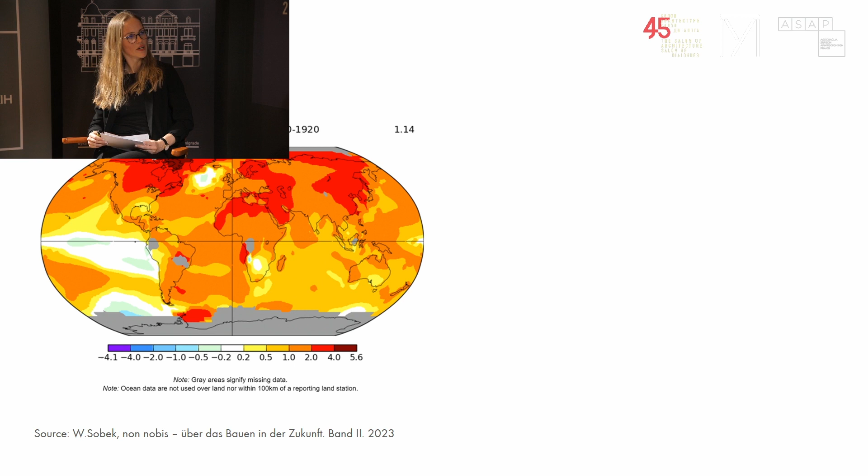Mostly because the construction industry is a big reason, or one of the reasons, why we're in this situation. Obviously not the only one, but it is a big one. Looking at these figures, the built environment and building activities stand for roughly—obviously very rough figures—35% of energy consumption, 50% of mass waste generation, and about 50% of material consumption. If we look just at mineral building materials like stone, cement, bricks, etc., it would actually be over 80%, so even a lot higher. And just looking at mineral building materials, about 50% of greenhouse gas emissions.

So that means there is a huge responsibility on us as engineers, as architects, but obviously also as investors and builders who demand new buildings and who want to build new buildings. At the same time, humanity is growing at an average rate of 2.6 people per second.

So this enormous consumption of materials, the waste generation, the energy consumption, and the emissions associated with the building sector are at the same time faced with growing humanity. So we have to build with less materials, but at the same time we have to build for more people. So this is probably one of the biggest challenges that we're faced with, that we have to build for more, but we have to build at the same time with less.

Use less new material. We need to build with something, so what should we build with? We need to use recycled materials, and then again, we need to build in a way that it is recyclable, the construction, that we can take the buildings apart and use the materials in new buildings. So all of those challenges that we see here, they're basically all aiming towards a zero emission construction of a building.

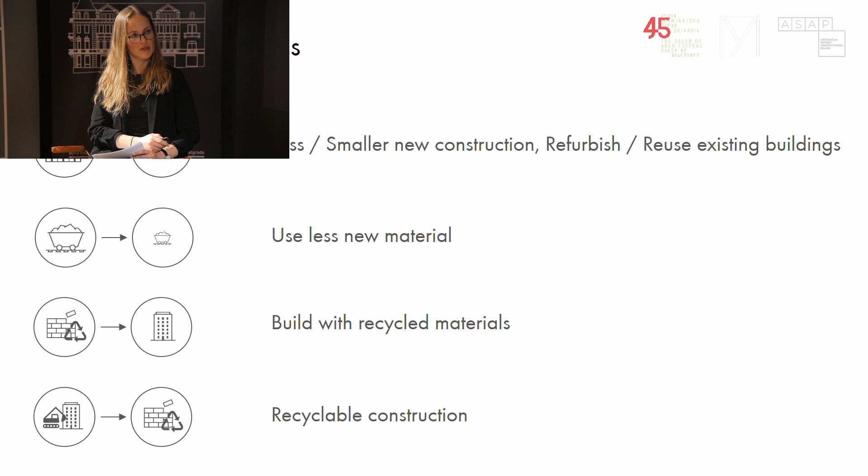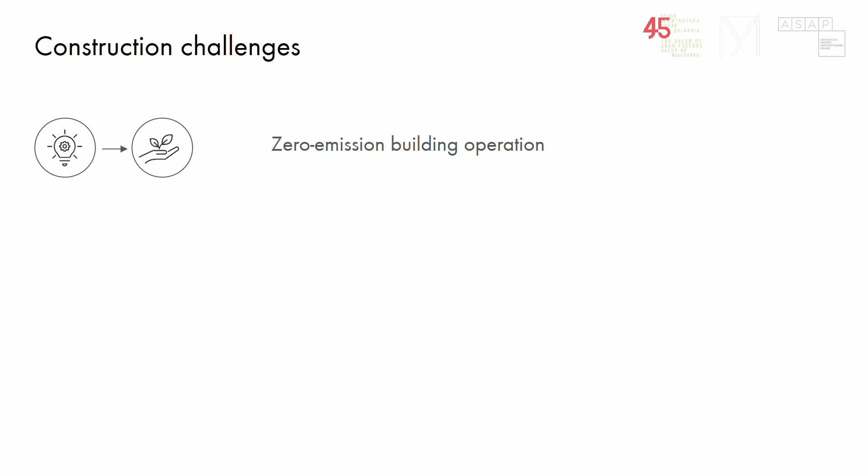We also have to design buildings so there are no emissions during building operation, and at the same time enhance biodiversity and take care of the microclimate.

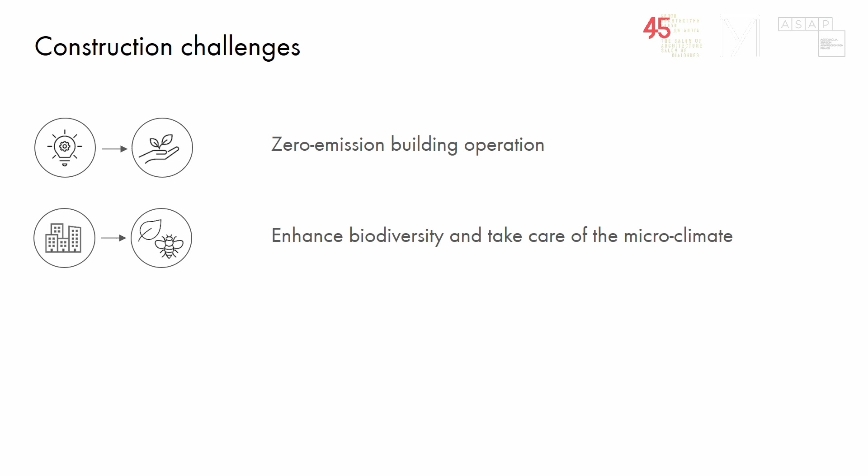So bearing those construction challenges in mind, I'd like to focus on a couple of key factors and show you a couple of project examples, which would be grey emissions, energy, circular economy, and microclimate. Starting with the grey emissions.

So here we see the emissions of, let's say, a conventional new building made out of concrete. If we look at this, like at the beginning, in the construction of the building, there's already a huge part of emissions occurring before the building is even put to use, the so-called grey emissions.

Then during operation, there's obviously emissions occurring over the time of the use of the building, which is highly dependent on the energy concept, on the energy efficiency of the building. And then usually after about 25 years, there would be some renovations taking place, some new materials, especially some components being renewed, like windows, etc. And then after another operation phase, the building is then demolished after 50 years, which would be a classic building these days.

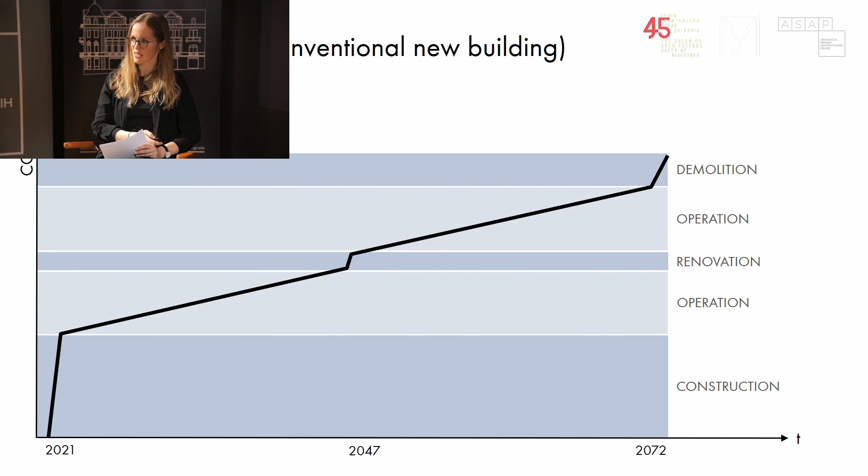Because some of the buildings that are built today are unfortunately not used for hundreds of years anymore, as they have been hundreds of years ago. Some of those buildings are still in use. So what we see, or what we've seen, is that there's a large part of the emissions that's already actually on the construction side of the building and not actually due to the operation.

That means that the energy consumption has gone down, with new energy regulations coming in place frequently. And therefore, the operational phase has decreased significantly if we look at the overall emissions over the life cycle. So what's happening still at the moment is that there is a transformation of the energy mix towards renewable, non-fossil generation. So what will happen is that the emissions will continue to decrease during the operational phase, meaning that the construction and the grey emissions will dominate even more and become even more relevant to be looked at.

So over the last couple of years, actually in Germany, there's been subsidies by the government for new buildings, which have mostly focused on energy efficiency, which we've basically seen here. So similar to the legislation, when a building has been specifically energy efficient, you would get subsidies from the government, which were actually quite attractive for investors.

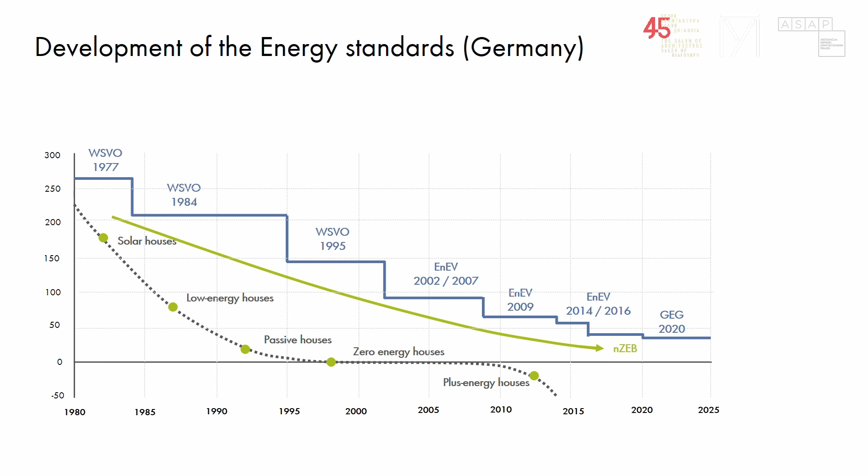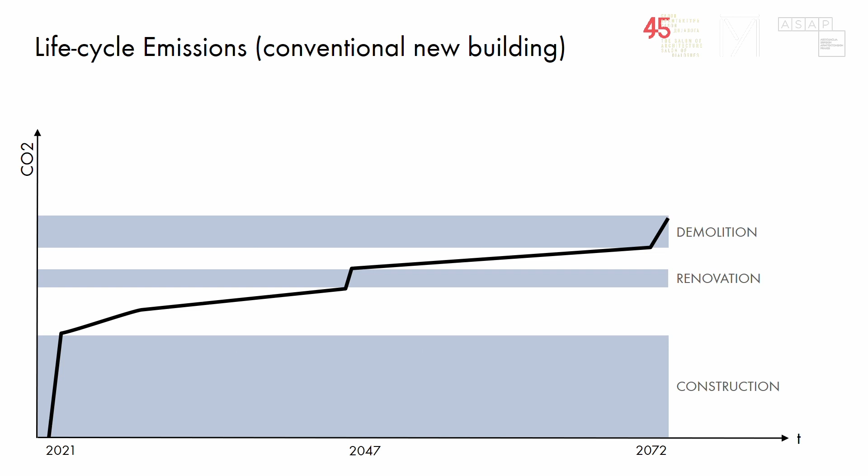And actually only just now, as of the 1st of April, they've started to not only give the subsidies to buildings that are energy efficient, but there is actually a second aspect that needs to be looked at, which is there's a certain energy efficiency class that needs to be achieved, but there's also a life cycle analysis that needs to be done with certain values to be achieved. So the grey emissions are now also being taken into account in order to get those subsidies from the government. The requirements at the moment are still relatively easy to achieve. So basically we're at the beginning, where we've started off with the energy efficiency classes a couple of years ago, but it is a start and it will continue to become more and more strict.

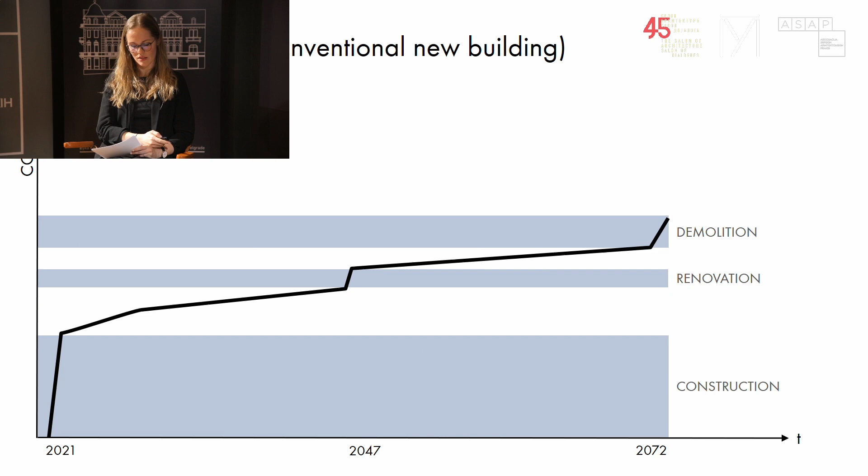So now I'll show you a couple of projects where we looked at the grey emissions in particular. The Quelle is a refurbishment project of ours in Nuremberg. We were responsible for the structural engineering and the facade engineering.

And there we did an emission study where we looked at two scenarios. The first scenario is revitalization with a partial demolition, so there were a few building parts being taken out, with still about 80,000 square meters - but it's a huge project, so there were still 170,000 square meters that were refurbished. The second scenario we looked at was entire demolition and then building a new building. To make it comparable, we looked at building exactly the same building, to exactly the same standard, with no differences to what's there.

Total demolition and new construction is still relatively widespread these days, because in most cases it's actually cheaper - less expensive to tear a building down and build a new one. Also, as we all know, with existing buildings you're usually faced with a lot of difficulties, like the height of the ceilings, which might result in daylight availability, or acoustic problems with the ceiling constructions in place. So it is tricky to use existing buildings, which is why sadly the second scenario is still chosen quite often.

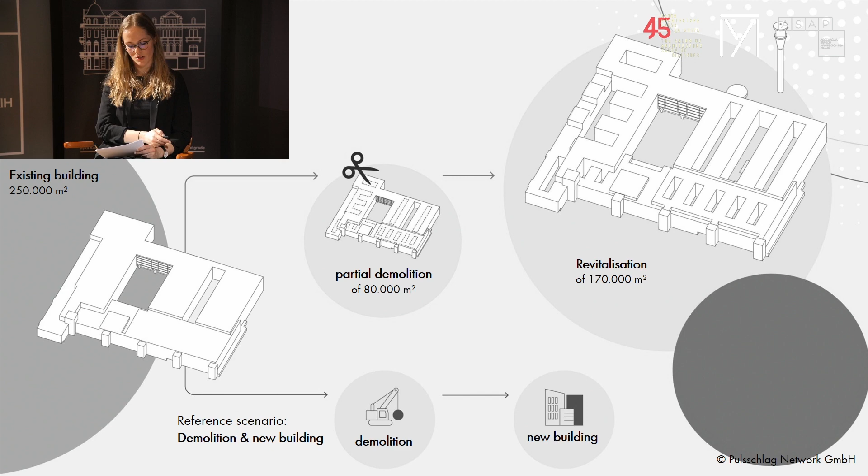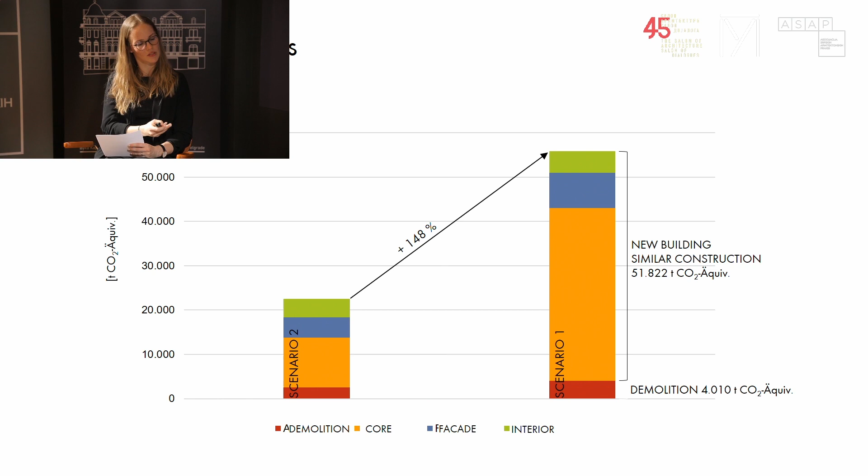So here you can see basically the same thing in a bar chart, which also shows you the proportions of demolition and rebuilding. Demolition, it must be said, is here without transport, so there would be transport emissions that would have to be added onto it. This isn't considered in this case, but it only makes up about 10% of the total emissions.

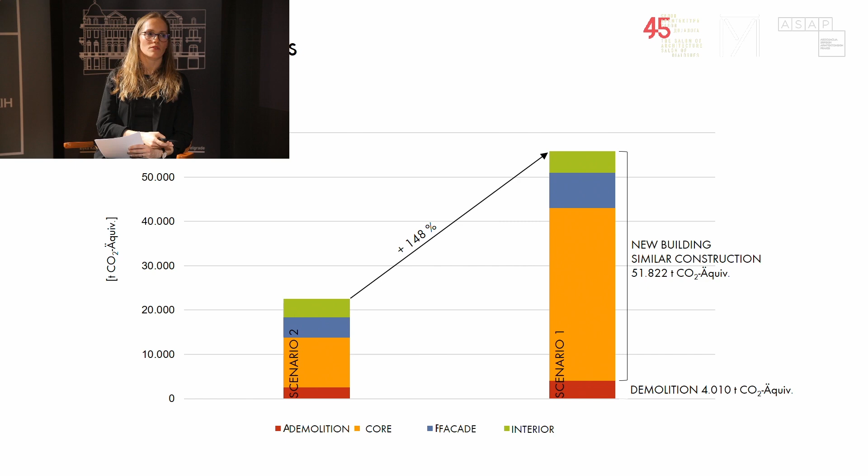Also, what needs to be said in that case - this is a study we did based on certain parameters that were set. As I've already said, we assumed the new building scenario would be exactly the same as the old one. There are obviously aspects like, for instance, materials from the old building that might have been able to be reused in the new one - something we didn't consider in this scenario.

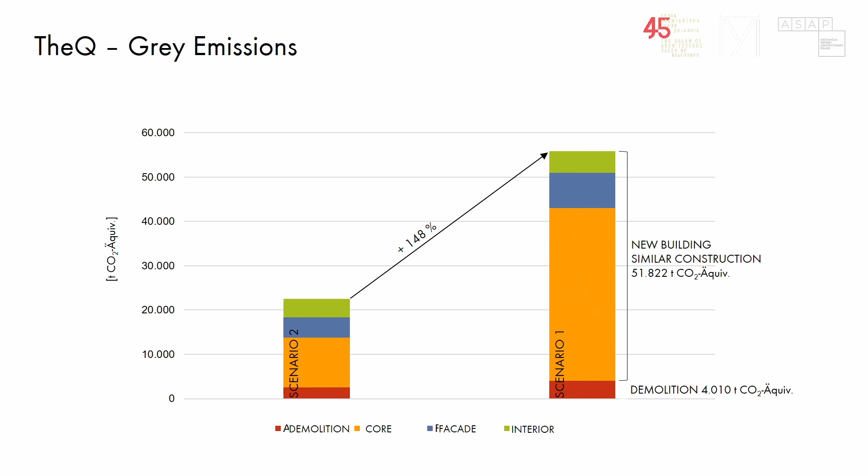At the same time, any structural engineer in this audience might know that with old buildings, with today's legislation it's sometimes quite hard to build in the same way, because legislation has become more strict and there are a lot more security factors in the calculations. So we might have had to build with thicker ceilings than they were able to build back then. There are a few factors that make this only a rough estimation, but under those parameters, this is the scenario that we calculated.

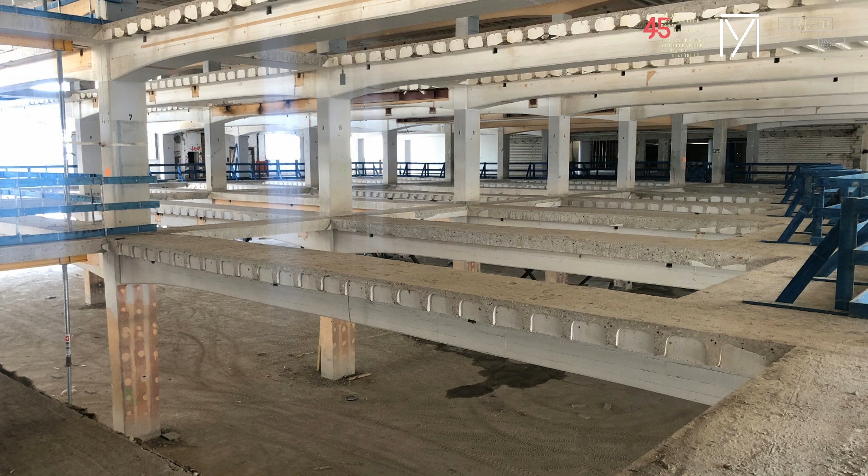This is an image of that partial demolition. There's an atrium space that was created where we took out a few ceiling bays in between the load-bearing structure.

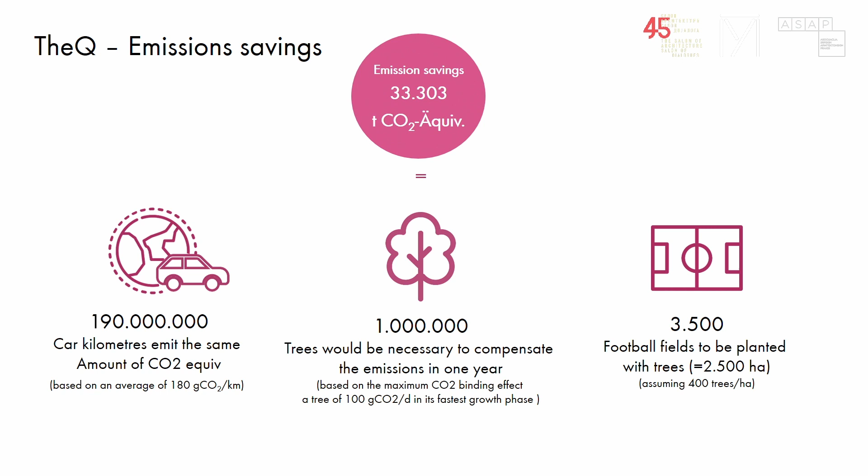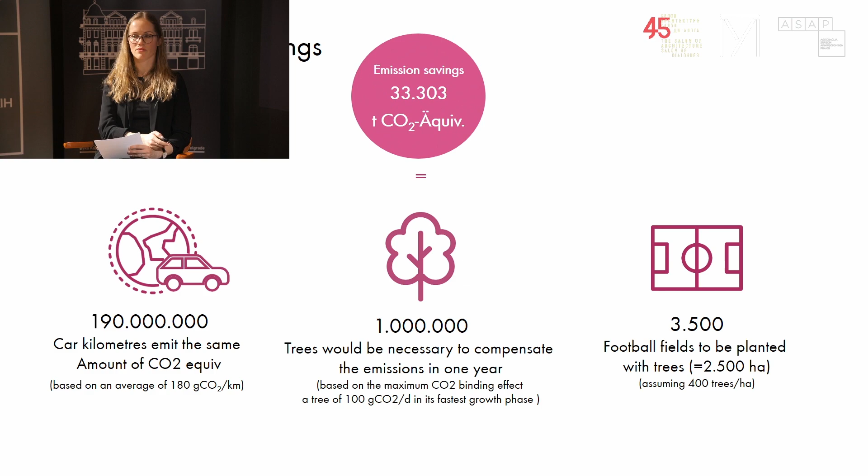The results of that study were that the savings amounted to about 33,000 tons of additional greenhouse gas emissions that were avoided - which would correspond to roughly 190 million car kilometers, or 1 million trees binding this carbon dioxide over a year, which would have to be planted on about 3,500 football fields. These are enormous figures that make quite clear that we need to look at the resources we've got and how we build, especially on these massive projects, when it comes to the basic decision of whether it's going to be a refurbishment project or a new building.

A second project where we did basically the same or a similar study is the Quartier in Austria.

So this is a couple of examples of how to approach grey emissions. Quite obviously, using existing structures is not always an option, because there might not be an existing building there, or in some cases the existing building might not actually be usable. So for new structures, it's important to look at the project-specific requirements and find the ideal structural system.

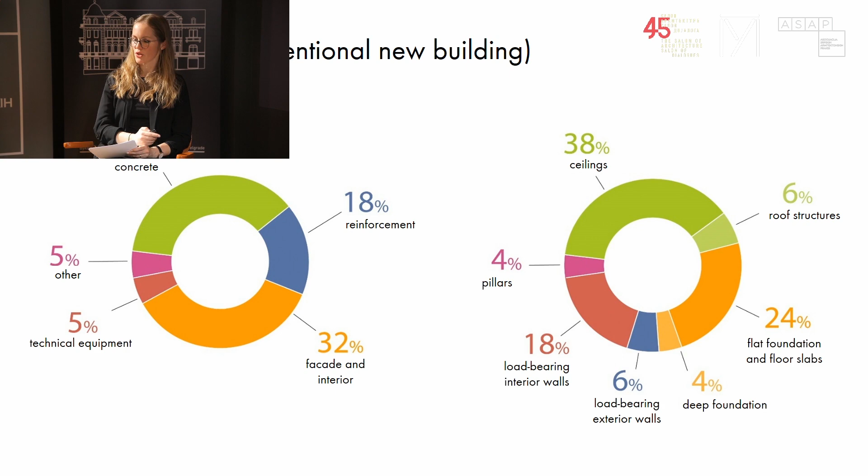So this is one of the main things we need to look at, and this is how we need to approach new buildings and new construction in the planning process: finding the ideal structural system for each project. This can be alternative construction methods, like wood construction, or a combination of wood and concrete construction. It can also be hollow body ceilings, which are very optimized in regards to the materials being used.

So looking at all of those different scenarios, always taking all of the aspects into account - one thing is obviously the structural engineering properties that need to be right, and the sustainability aspect, but then also aspects like acoustics need to be taken into account. Can we achieve the acoustic requirements depending on the building usage? So it's always relatively complex, trying to incorporate every single aspect into the decision.

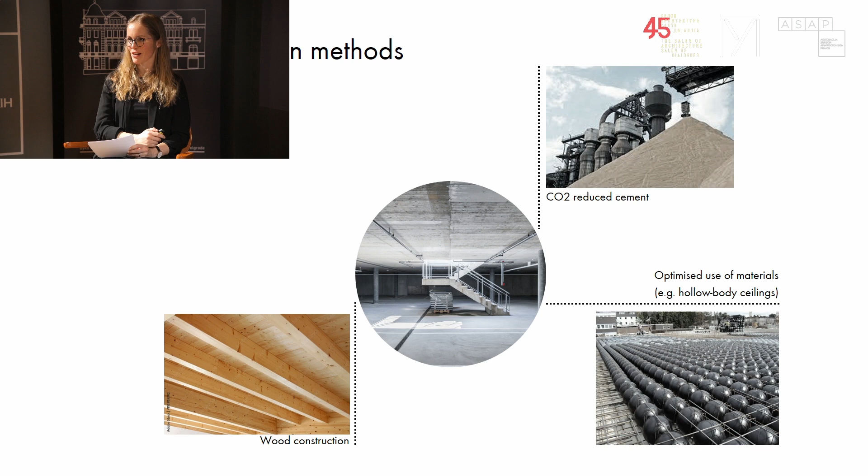Alternative construction methods is obviously one scenario, but even if none of these alternatives is suitable for the project, it's still about looking at the structures in particular and making sure there's no over-dimensioning in the calculations - rather than just defaulting to 25 centimeters of concrete because that's what we're always building, but actually looking at the building and doing the calculations properly to find the ideal scenario for each project.

The good thing about this latter approach is that while with wood construction you're very dependent on the client and the investor - are they up for it, is everyone on board, because wood construction usually has higher costs associated with it - with the latter option of just making sure there's no over-dimensioning, every structural engineer can influence this. So this is the baseline and the goal for all of our projects: material-reduced structural systems.

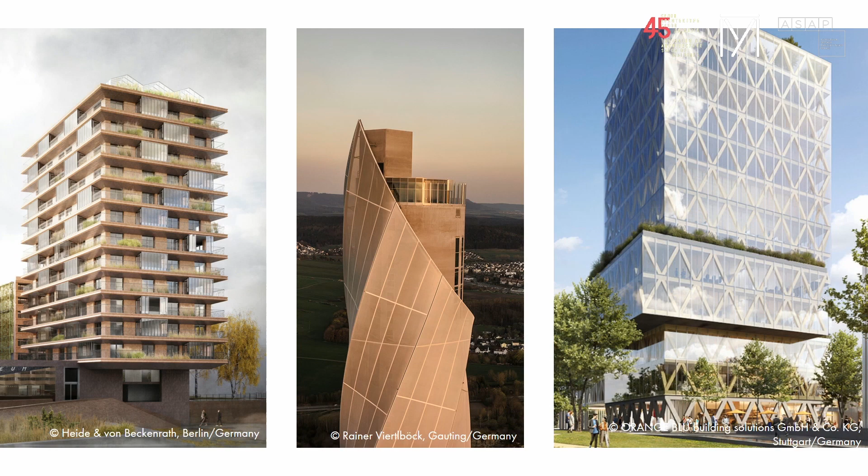So this is just a couple of, it's not just renovation projects that we do, this is a couple of new projects, but I'm not going to go into more detail about them. There's one on the right-hand side, for instance, with a wooden structure.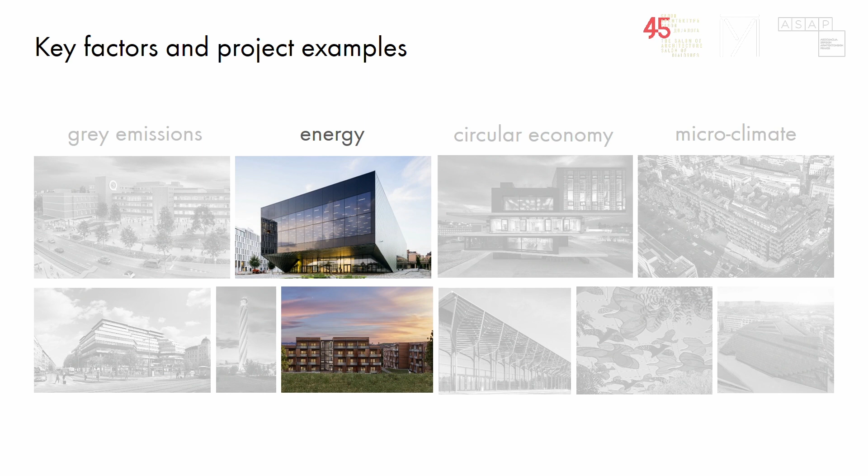So that was about the grey emissions. As we've seen when we looked at the life cycle of grey emissions of a building, the operational energy phase is becoming less and less dominant. Even so, while grey emissions might be dominant, we still need to look at the energy consumption and emissions during the use phase. Firstly, because there are still emissions associated with it - just because it's less doesn't mean we can neglect it. So there's still emissions associated with it, and the path toward non-fossil energy generation is still on its way; we'll still be on that path for a while.

Secondly, there's also the social aspect and associated costs, because there are always costs that come with running a building, which we need to take into account, and energy bills are a factor in that. So looking at the energy efficiency of buildings is probably the most well-known part of all the topics I'm going to talk about, but it's still an aspect we need to look at.

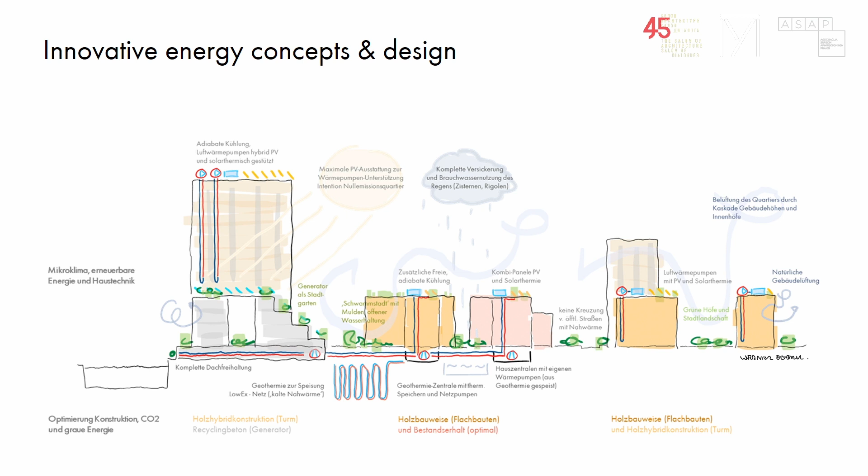So the approach to that is with intelligent energy concepts, and the most important part of the energy concepts is looking at both active strategies, but mostly also passive strategies. So looking at solar gains through windows: what are the passive strategies, without actually using any energy, that we can do to reduce the energy consumption of the buildings? For instance, as I've said, solar gains. In summer, we don't want them. In winter, we do want them. So looking at adaptable strategies to make use of those.

One important tool is always simulations, all sorts. In this case, a photovoltaic simulation. But this is always a tool that can be sometimes quite hard to sell to the client at the beginning of the project, because why do you need simulations? You can just calculate it, but it is the best way to efficiently find the right system for the project.

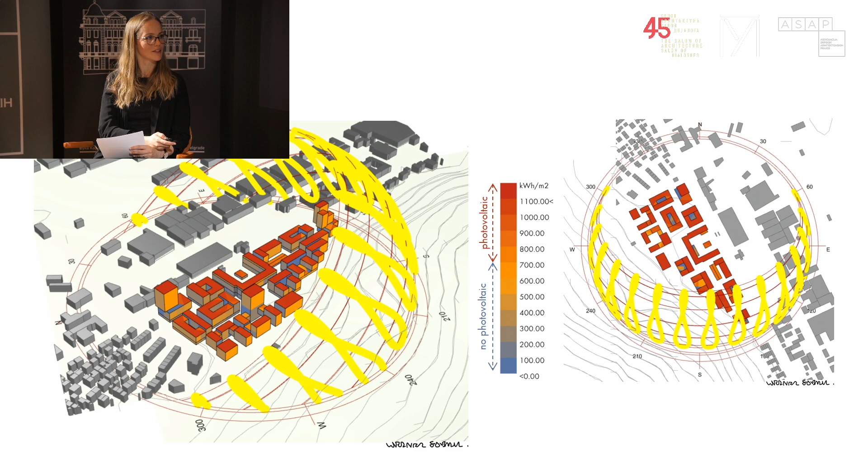So this is the Futurium, formerly called House of the Future, in Berlin. It's an exhibition and event building in Berlin, and we did the facade engineering, sustainability consultancy, building physics, and the sustainability certification, all sorts of things that come with it, like life cycle analysis. One focus of the consultancy was the close cooperation with the MEP planner in this case, to find a joint optimization of the energy concept. So the result here was an innovative energy concept with regard to active and passive measures.

And thanks to the comprehensive consideration of all sustainability issues, the building fulfills the BNB Gold standard. BNB is a German certification system similar to LEED or BREEAM, but it is the certification system that is used in Germany for public buildings. So actually it's compulsory for all public buildings to be certified according to this system. And the House of the Future, as it's called, I guess it was to be expected, fulfills the highest standard. That was the goal set from the beginning.

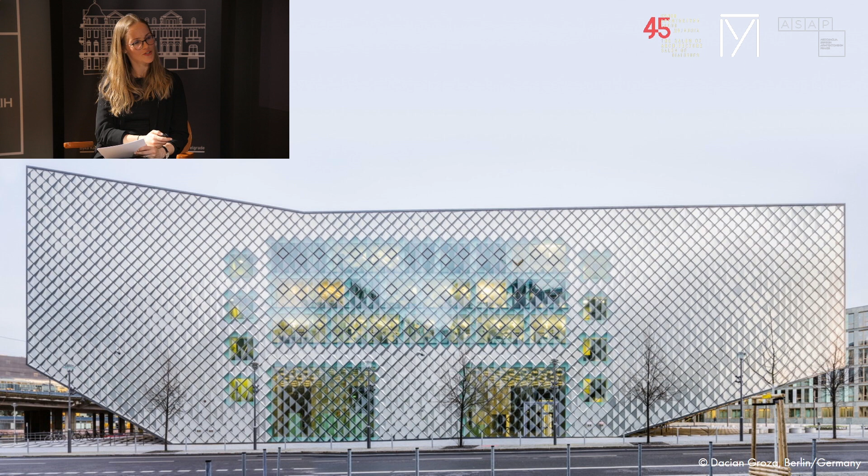Despite its sophisticated, very interesting architecture, it is a primary energy plus building, which was made possible because it's a very compact design. There are a lot of passive measures used, especially in regards to the building envelope, and there's strictly demand-oriented air and energy supply, and very highly efficient building systems, using a lot of solar thermal energy and photovoltaics, and electricity storage systems. So with those storage systems, the demand and the generation peaks can be balanced out. And in the annual balance, the building provides a primary energy surplus of 8 kilowatt hours per square meter, or 99,000 kilowatt hours per year.

Those figures are in relation to the German Energy Efficiency Act. So according to the German Energy Efficiency Act, what is taken into account in these calculations is things like lighting, all of the building technology. What is not taken into account is things like laptops, the user equipment that's brought in. So that energy consumption is then obviously added on, but it's always quite hard to account for that.

Another project: the first construction phase is finished, so this is actually an actual picture of the first part of the project. It's the Plus Energy Quarter in Stuttgart, based on Werner Sobek's so-called active house modules. It's a total of 6 buildings, and it's the largest wooden house quarter planned to date in Germany by a single investor. So it's not the biggest quarter, but the biggest quarter by one investor, and it's all prefabricated timber modules. It's only the underground car park that's obviously still made out of concrete.

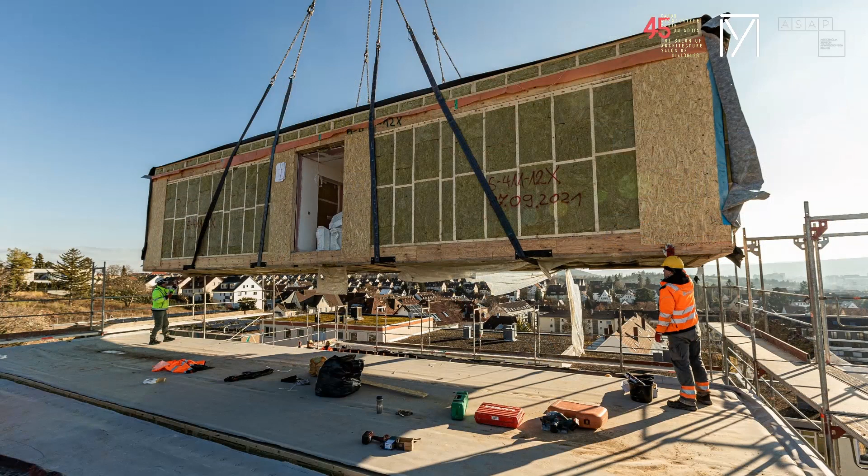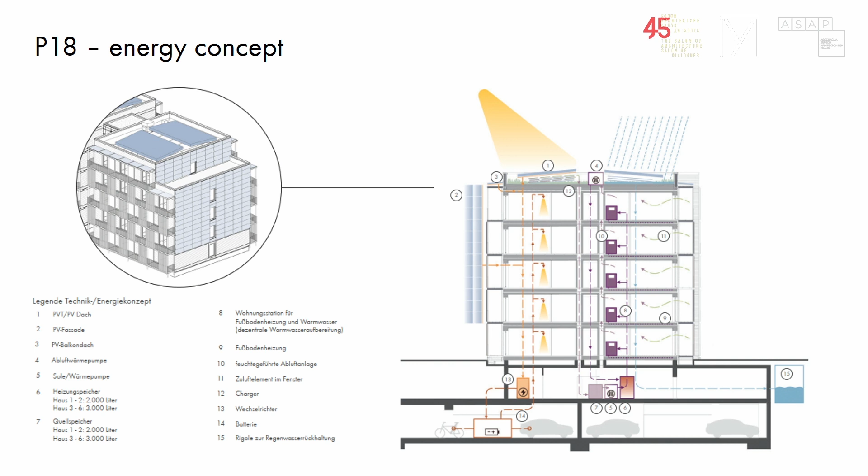And the goal of this project was to make it an entire Plus Energy Quarter. So this was done by PVT collectors that generate electricity but also heat, and which serve as a source for the heat pumps. And then there are small exhaust air heat pumps that are also put into the main circuit of the heat pumps. The entire building envelope is built according to passive house standard, and in an annual balance, more energy is actually generated from sustainable sources than is needed.

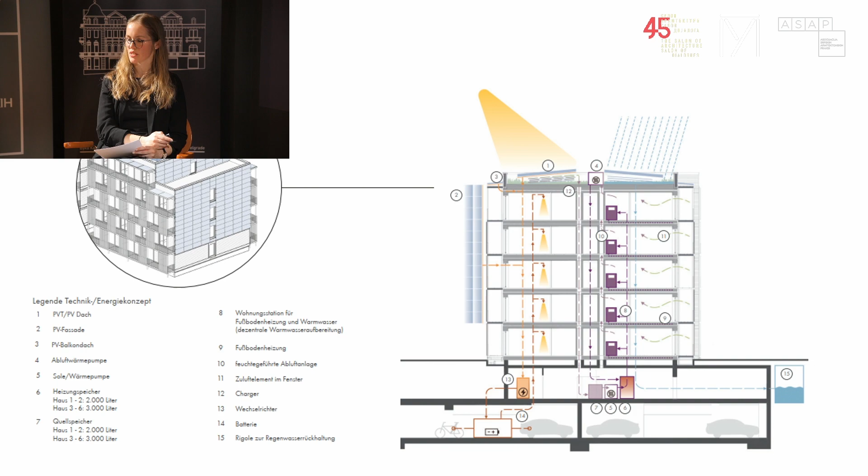This efficient energy concept was also made possible by means of simulations. So there are a lot of simulations carried out here by the MEP and technical building equipment planners, because the purely static regulations approach is just not that useful in those cases. So this is also an image of this. The first part of the project has been completed, and now the second phase is just in construction.

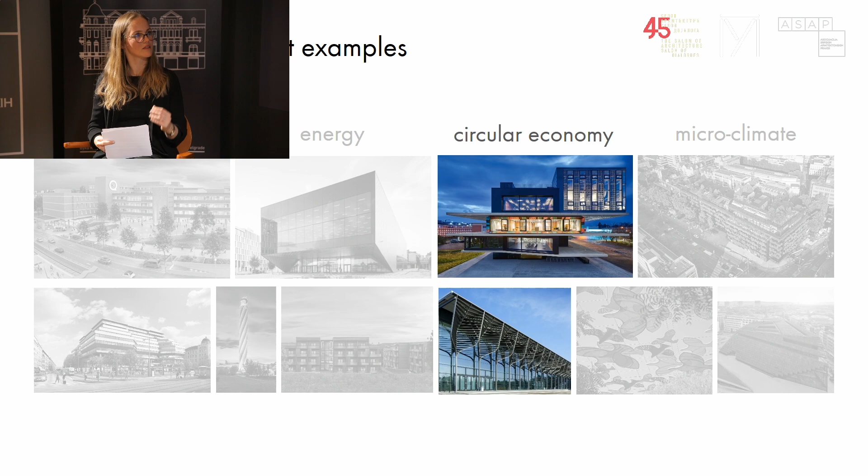Right, so grey emissions and energy, I think those were probably relatively already quite widespread topics that most of you have heard about, and they've probably been in the press for a while. Circular economy is something that is becoming more and more relevant. There's not been such a big focus on it, also not in Germany. There's no sort of strict regulations that buildings have to comply with certain standards in that regard.

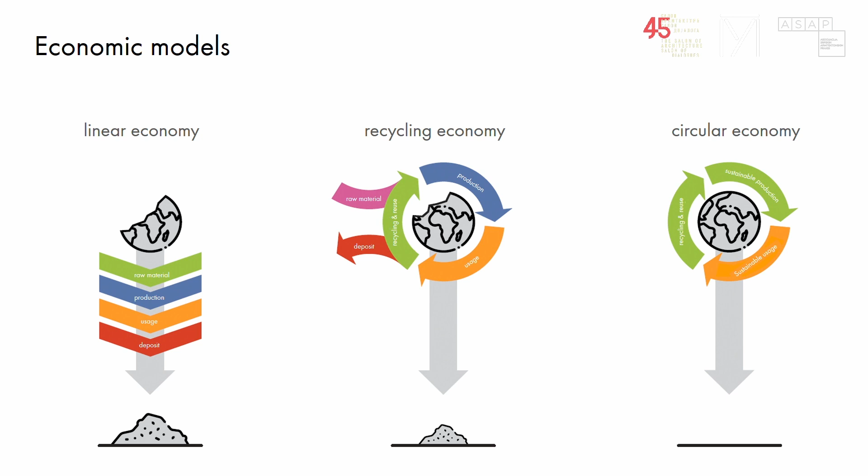So probably to start with, obviously, what kind of economic models are there? There's the linear economy where everything is wasted at the end, and there's recycling economy, which is probably the standard these days. We try to recycle a lot. Recycling economy means there's a lot of downcycling though, or some of the things are recycled and reused, but there's a lot of downcycling and still some waste

being generated. And then there's a circular economy where all materials are kept in the loop, and as you might have guessed, this is the model that we need to aim for in the construction industry, meaning that the materials that we use in our buildings can be taken apart at the end of the building's lifetime and then can be used without being wasted in the new building. Either they can just be used as they are, or maybe there's also some processing done, but this is what

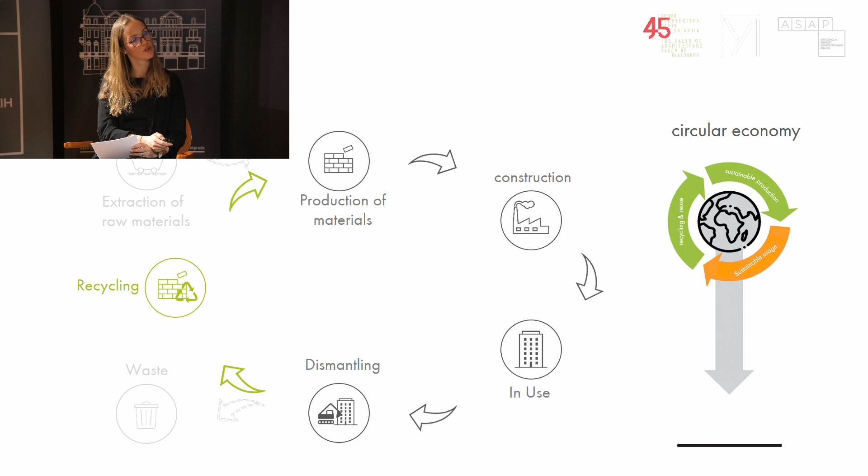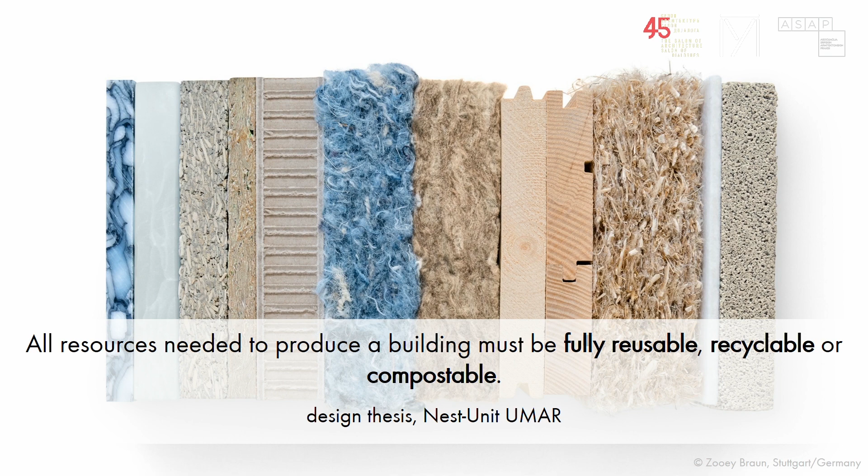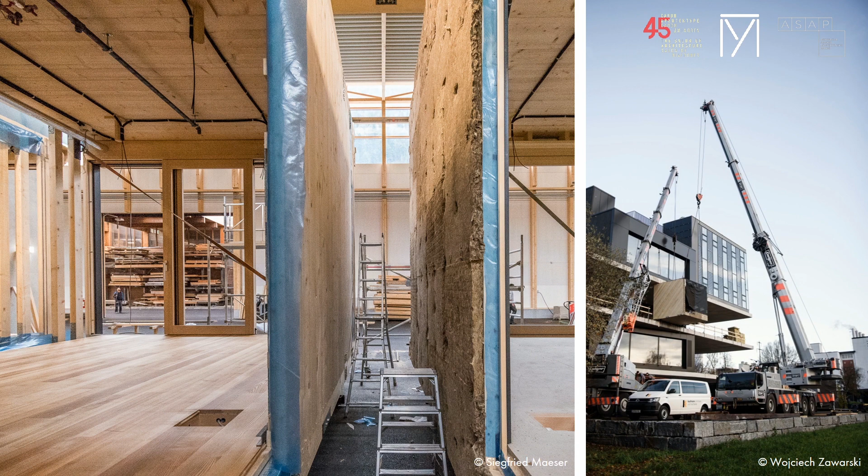And so therefore the project can be seen as a temporary material storage. The materials are stored there, it serves as a storage unit, and then they can be used in other projects afterwards. So the building is a completely prefabricated building from a modular construction, as you can see here. And with those images on the right-hand side, you can see how it was then put into the building. The left-hand side is when it was prefabricated, and the right-hand side is when it's actually put into the building.

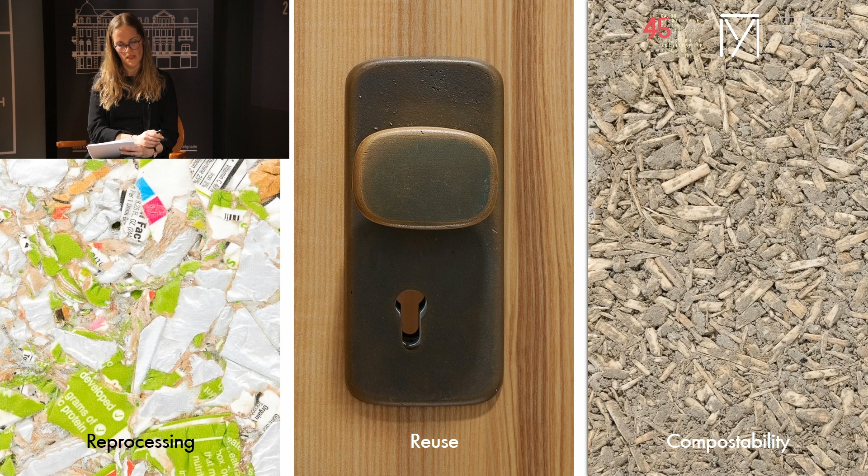The principles that play a role here are reprocessing, reusing, and compostability. For example, those door handles in the middle were reused from another project. They were taken out of a building that was about to be torn down and then reused in this unit.

In order to ensure deconstructibility and recyclability, obviously the connections are particularly important, because if we glue everything together, we can't take the materials apart anymore. So there are only screws, joints and brackets being used, and no glued joints in this project. We experimented a lot with alternative materials, which is easy to do in an experimental project. It's sometimes harder to do it in regular projects. So I'll show you just a couple of examples.

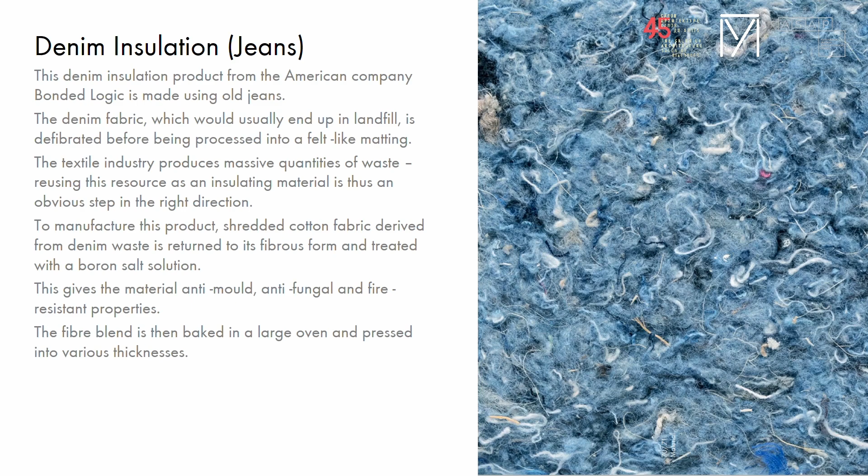So this, as you can already see from the color, is a denim insulation product that was made using old jeans. Usually those old jeans would end up in landfill, and in this case they were processed into felt-like matting. And since the textile industry produces massive quantities of waste, especially with fashion these days, with some of the shops where the clothes are sold to be worn once, reusing this resource is an obvious step in the right direction.

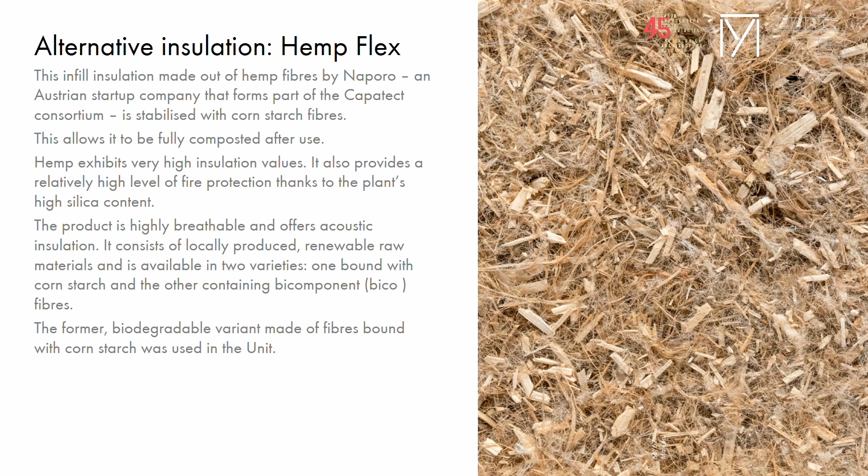And then one last example would be Magna Glass, which is made out of waste glass that is initially broken up into shards and then undergoes a complex sintering process that only involves effects of temperature and time, and then makes quite nice glass panels.

So the project, I guess, proves that ecological material selection does not necessarily mean that design demands have to be waived. On the contrary, it is sometimes the intensive examination of cycle-friendly building methods and the questioning of the standards that inspires architectural quality, because you're made to think in alternative ways. You're thinking about what are the different things that we could do, so it can be quite inspiring.

With it being a research project, it's unfortunately not a building standard yet. So this is a relatively unique project at the moment. And what can be a first step, though a very small first step, is sustainability building certifications, because they evaluate a lot of different aspects, and among them, for instance, one of the criteria evaluated in the sustainability certifications is the deconstruction and recycling possibilities.

So it does make you think about these aspects, it does make you evaluate them and question them, and even though in the certification system there is no minimum requirement that has to be achieved, so every project can still get certified even though it doesn't comply with any of these issues, it is a good start to make people and project teams think about them.

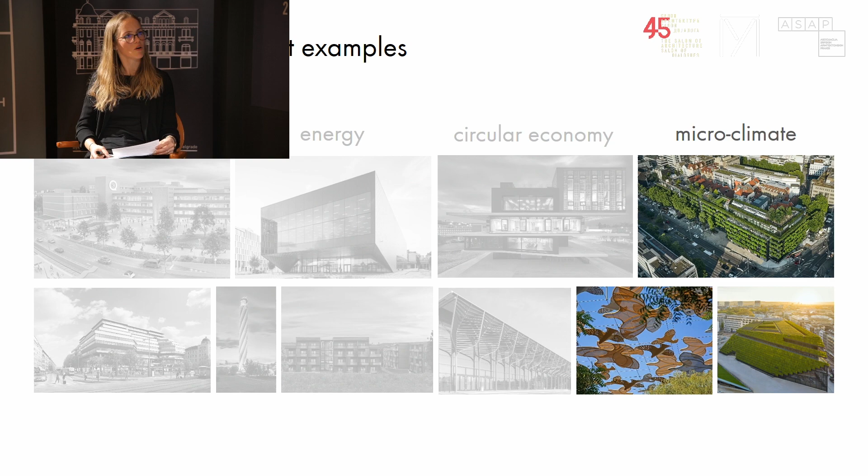So grey emissions, energy and circular economy are all topics that are mostly looking at the building itself. So how can we construct a building looking at these aspects? There is relatively little influence on the surroundings when looking at these aspects. The last key factor I'd therefore like to talk about is the microclimate, because it is something that looks beyond the building itself and is quite important if we look at how our cities develop.

Because one thing is being in a building that is sustainable, but, well, the majority of our time we're inside buildings, but we do want to enjoy the time that we're outside them as well in the cities that we live in. So the parameters of radiation, wind, temperature and humidity are the main aspects that influence the microclimate. And all of them together can lead to the so-called heat island effect that we all know, that it's a lot warmer in the cities than outside the cities.

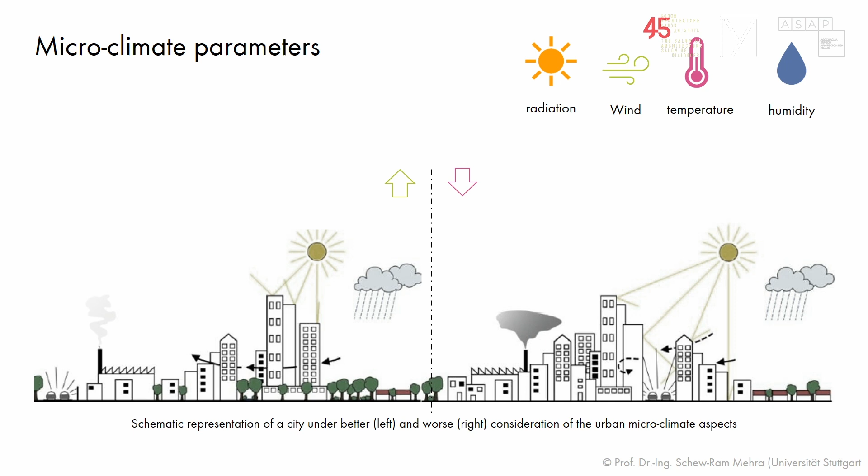So there's also a schematic representation of a city under better and under worse consideration of the urban microclimate aspects. So the factors that need to be looked at in more detail to improve the microclimate are vegetation, bringing green into the cities; water, water surfaces; materials, all sorts of materials, whether it's on the floor, but this is where the buildings also become relevant. It's the facades, it's all the materials in the city that contribute to the microclimate; and it's shading and the supply of fresh air.

So all of these need to be taken into account at the urban planning level, when planning out quarters, but most of the projects are actually only individual buildings. You're planning one building, a new office building, a new residential building, and in those cases it's about looking at that site as well, and there are a lot of architectural measures when designing a building that can be taken and can contribute to the improvement of the microclimate.

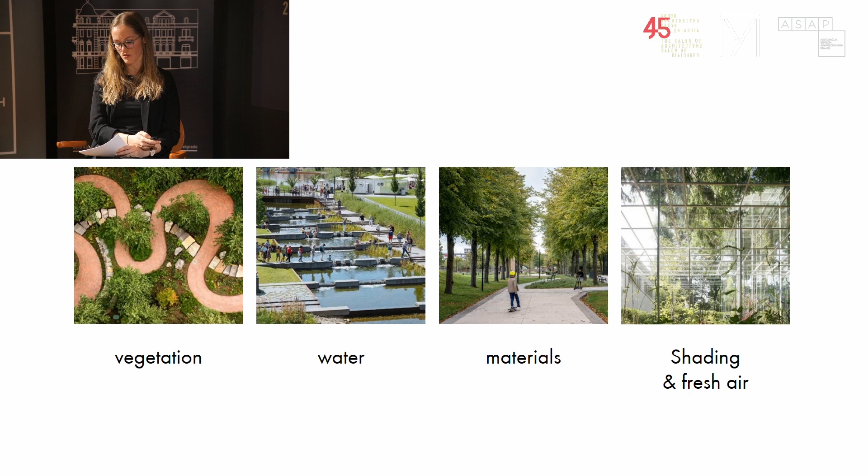In order to verify and evaluate these measures during the planning process, extensive microclimate simulations are carried out, to evaluate the concepts that we're thinking about, how effective they are, and to look at different scenarios and compare them.

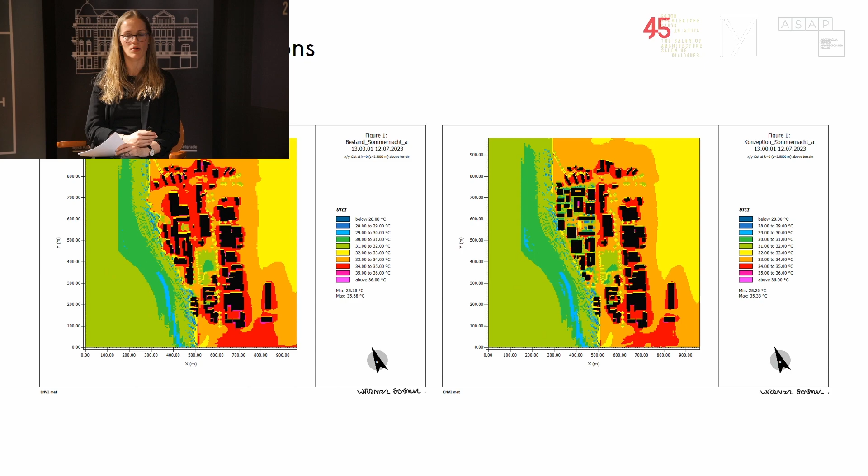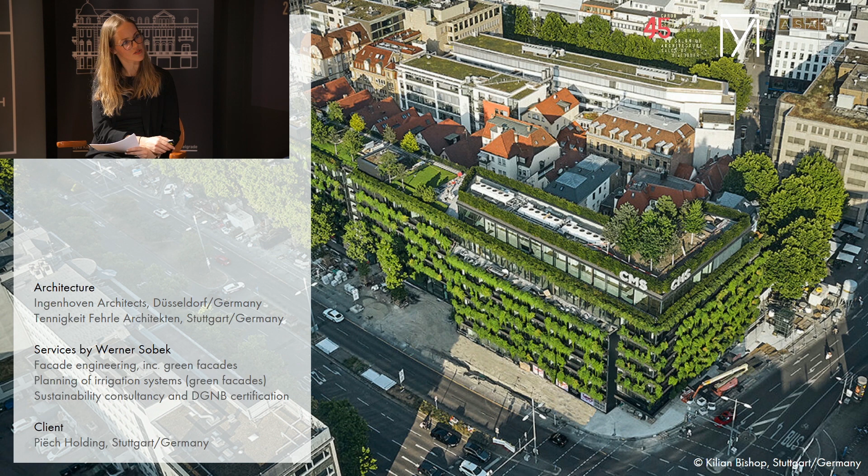So one of the projects that is actually currently in the finishing phase, with the first tenants already moved in, and only the last few bits being done, is the Calwer Passage in Stuttgart, Germany, where we provided facade engineering services, including the very dominant green facade, as well as sustainability consultancy and the DGNB certification.

The building will be certified according to DGNB Gold. At the moment, we are just putting together the final documentation to hand it in to be certified.

The building stands out quite obviously due to its green facade, which makes an effective contribution to the microclimate in the surrounding area, which we can see here. So this is already actual images.

Green facades have a lot of advantages and disadvantages. Starting with the advantages, I guess the most obvious one is the improvement of the cityscape. It helps the well-being of the people in the city, it makes you feel good. It's like the quality of life that it brings to a city.

Especially in that project, it's one of those where people walk through the city not knowing where they are, and then suddenly they're just looking at that facade and admiring it. So this is to the outside, to the city, but also from the inside—it's nice to see the green from the inside.

Another advantage would be the rainwater management, so the retention of rainwater in the substrate, which leads to a delayed release, which in this type of green facade is a lot more than it would be in a horizontal vegetation.

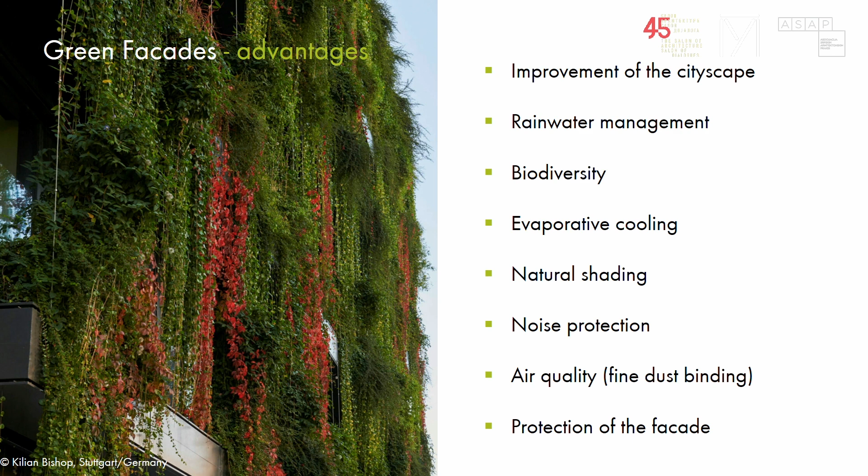And air quality, because they bind fine dust, which is a huge problem especially in Stuttgart, since Stuttgart is in a valley, so we've got a huge problem there with fine dust from the streets. The plants also provide oxygen, and provide protection of the facade, since the vegetation protects it from external influences such as weather conditions like storms and hail.

Obviously, it only protects the facade if there is no damage caused by the roots of the plants. And that can be ruled out.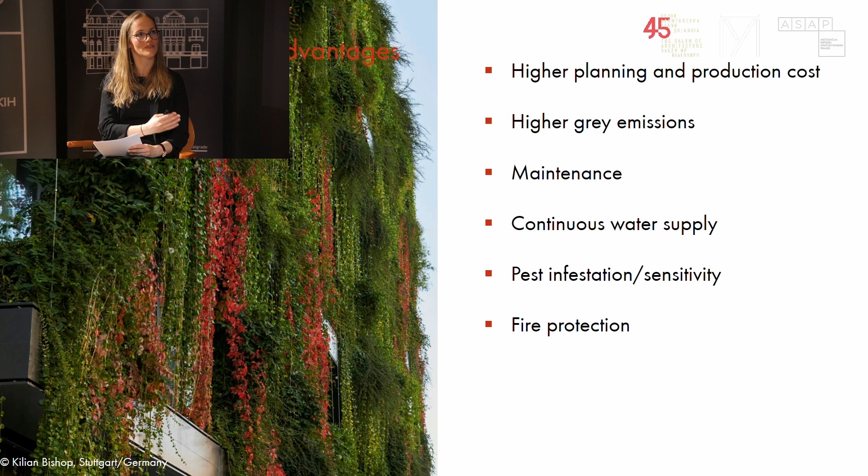And in that case too, this is a bit of a tricky scenario—there's a lot of higher grey emissions associated with it, because all of those steel structures underneath that are used to hold the plants wouldn't serve any purpose if the plants weren't there. So it's that kind of evaluation that needs to be made: what is the green facade worth to me?

Maintenance, quite obviously, the facade needs to be maintained in a very regular cycle. There's a continuous water supply that the plants need, because this facade is obviously only nice if it's green—no one would be looking at this building if it were brown and dry. So there's a big issue with continuous water supply, and in this regard you need to look very specifically at grey water use, etc.—how can you reduce the fresh water actually needed in this case.

Then there's pest sensitivity—having a lot more vegetation close to the facade can bring in pests—and fire protection, especially if the facade gets dry. This is a big issue that needs to be dealt with.

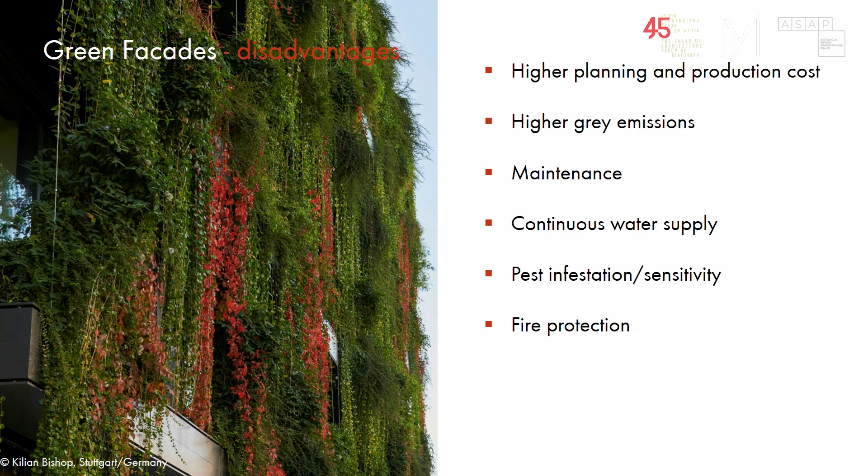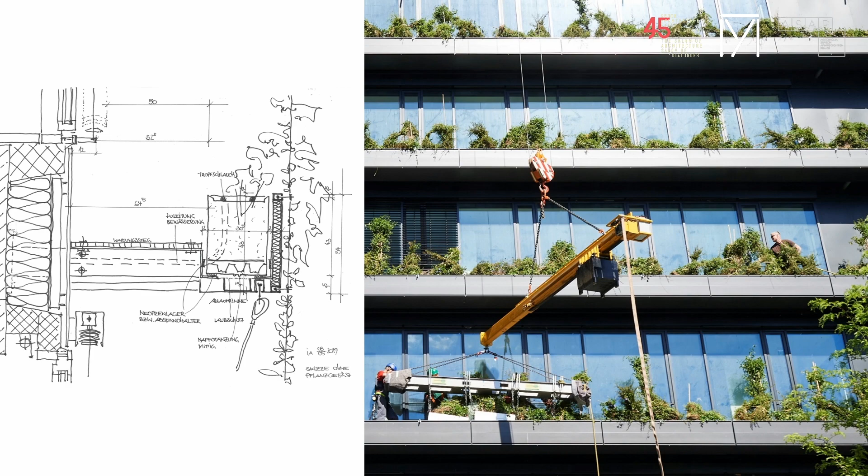So here's still a few images of the project with a sort of hand drawing showing how it's set up, from when the plans were put in place. And this is from underneath, so it's truly fascinating to look at. Anyone who's ever in Stuttgart, it's definitely worth paying a visit.

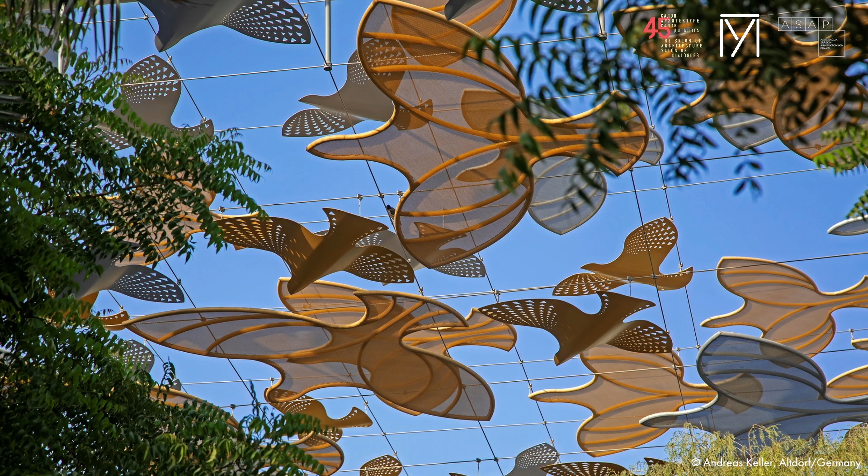Another project when looking at microclimate is the Expo Shades. We developed a trio of innovative shading systems for the Expo 2020 in Dubai. All of those shading systems link together all of the national pavilions of the exhibition site. The first system is a multi-layered horizontal cable net structure with approximately 3,500 membrane elements in those bird-shaped membranes that span up to 4 meters, all sorts of different sizes, but some up to 4 meters big.

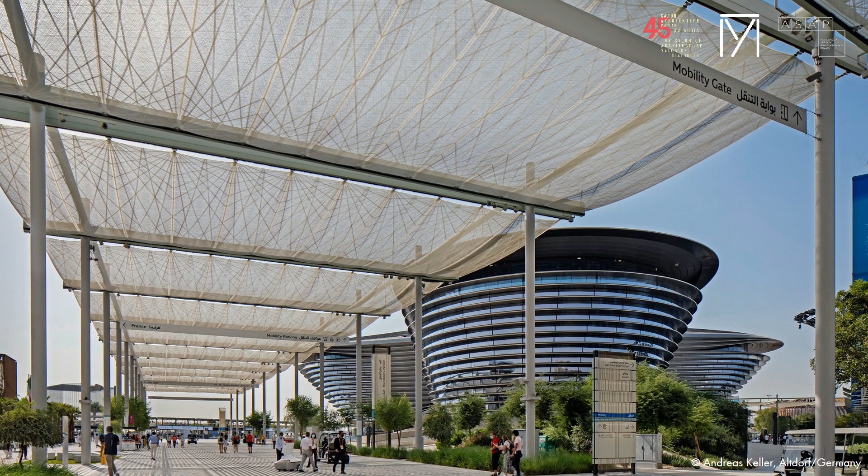The second shading system is also a membrane structure that can be moved if there's excessive wind loads. The design offers shade during the day and can be used as a projection surface at night. The third system was made of pergolas with plants put in place, around 11,000 climbing plants that offer shade while providing natural cooling via transpiration. All three shading systems were constructed to tolerate high deformations, with quite large spans used so that they don't compromise the views of the surrounding landscape.

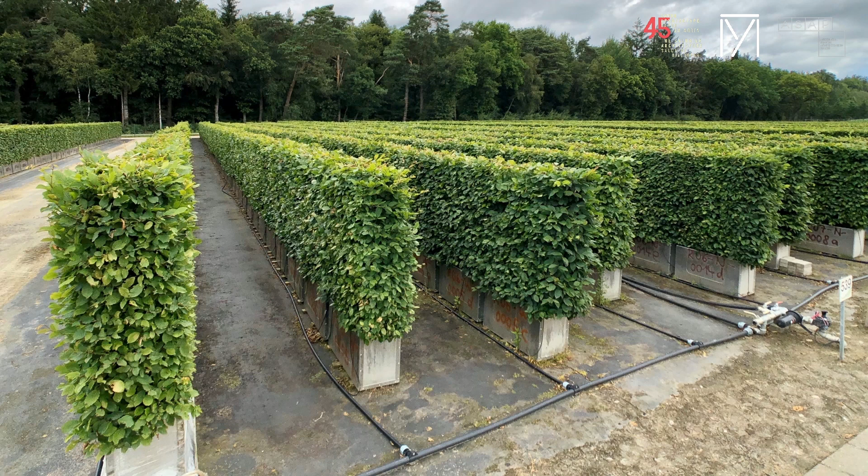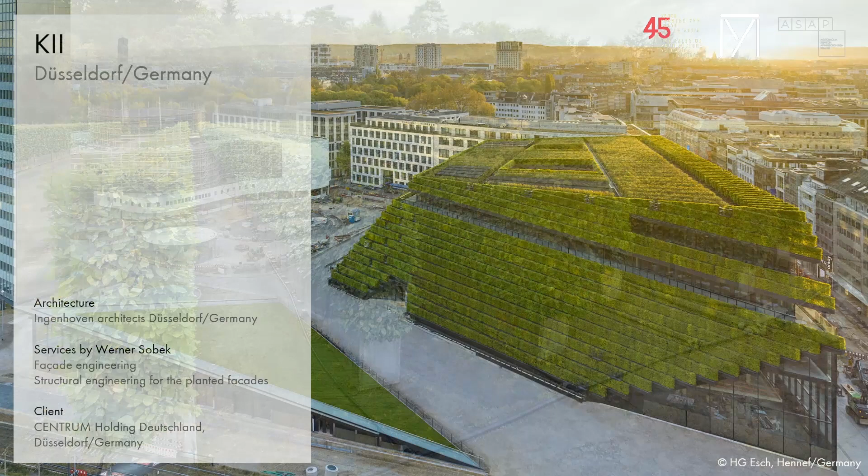The third project I'd like to show you in the context of microclimate is another green facade, the Köbogen in Düsseldorf. It's an office and commercial building where we also did the facade engineering, and it's planted with more than 30,000 trees. Obviously they weren't put up and then waited to grow - they had to grow first, and then were put into place. So the facade looks like this once the building is finished, though at that point it wasn't actually finished yet on the interior.

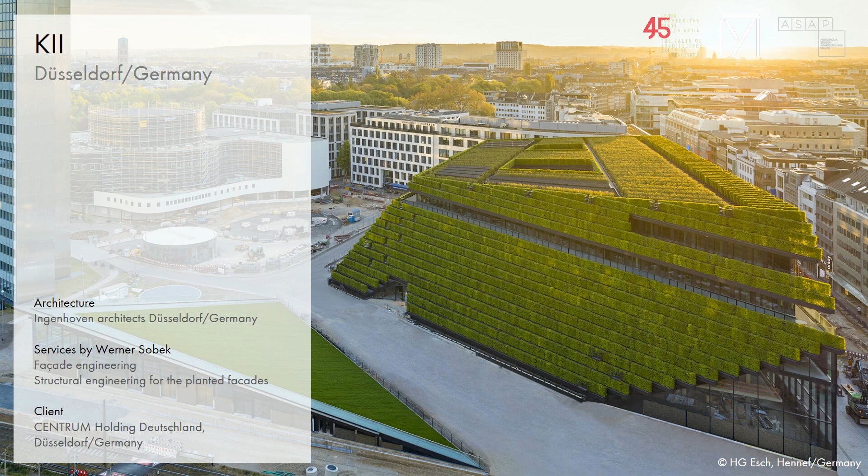We've already talked about the advantages but also disadvantages. It reduces solar heat radiation, stores moisture, and this facade roughly absorbs as much carbon dioxide emissions as 80 large trees would. This project was also certified - we didn't do the certification ourselves, but it received the highest possible certification, platinum level, from the German Sustainable Building Council, the DGNB system.

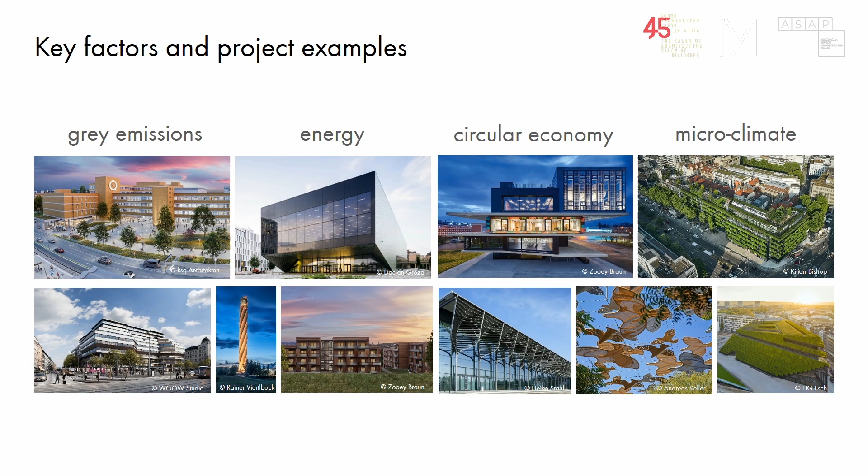So these were a couple of projects, all focusing on those factors: grey emissions, energy, circular economy, and microclimate. Why did we talk about those factors? Why did I show you those examples? Going back a bit to the challenges we talked about and looked at - I'm not going to read them out loud again, but truth be told, it's hardly ever possible to incorporate them all into your projects. I've shown you specific projects for all of those key aspects, purely because I wanted to show a wide range of projects, different types, different approaches, but also because there's no project that serves them all.

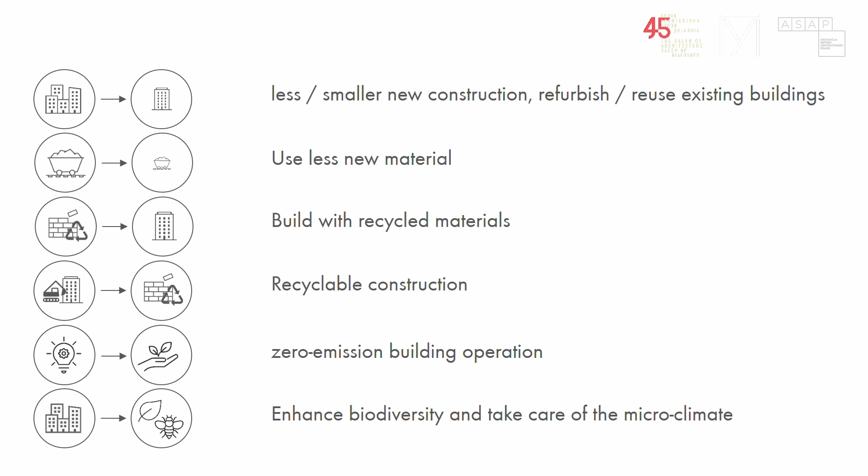Like for instance the House of the Future that we've seen, the building in Berlin - it's got a very innovative energy concept and strives for zero emission operation, but doesn't have any positive impact on the microclimate. Whereas the projects we've seen lastly that have a great influence on the microclimate do not have an outstanding energy concept or recycling concept. So this is the problem we're faced with - it's not so easy, there is no very clear path, no simple checklist of things to comply with to get the perfect building. There are all sorts of different aspects that need to be taken into account and then evaluated.

So how do we, what's the process to a sustainable project? How do we start those projects, or how do we try to start those projects? At first we do a context analysis. We ask the questions: what is sustainable for the client, for the location, for the use of the building, what are the project-specific requirements, what are the project-specific aspects that come with the location, the usage, or the client.

From that context analysis, we then put together a catalogue of requirements that emerges from this, and make a prioritization of the requirements and the definition of the goals. Important in that regard is that the goals need to be verifiable. They need to be achievable goals, goals that we can actually look at and define.